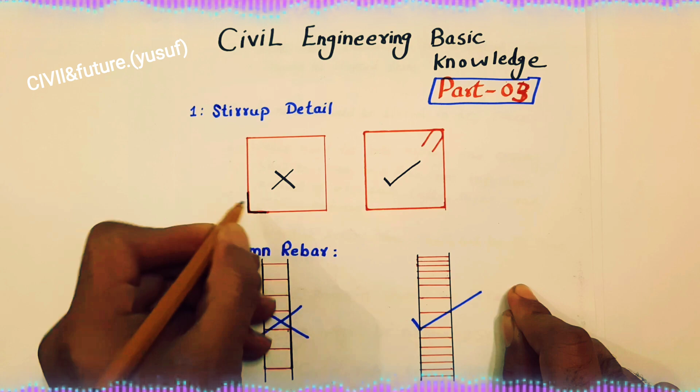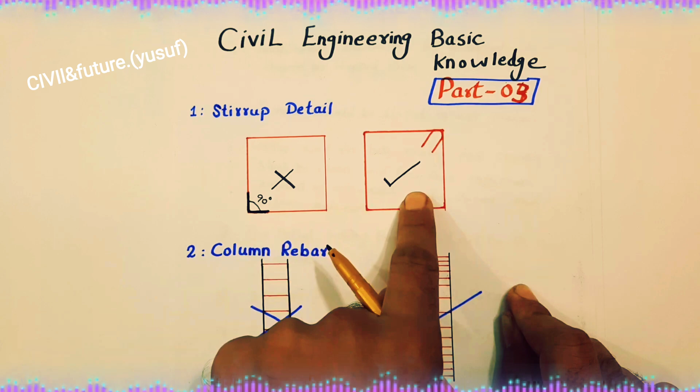Okay guys, you can see this is a stirrup, and you can see the hooks, which are bent with 90 degree. You can see clearly. So guys, this is a wrong method, this is not the proper method, to use the hooks bent with 90 degree. But this is the proper way, the right way of stirrup to design for beam in domestic or commercial building. You can see the stirrup size is same, but here the hooks are bent with 135 degree.

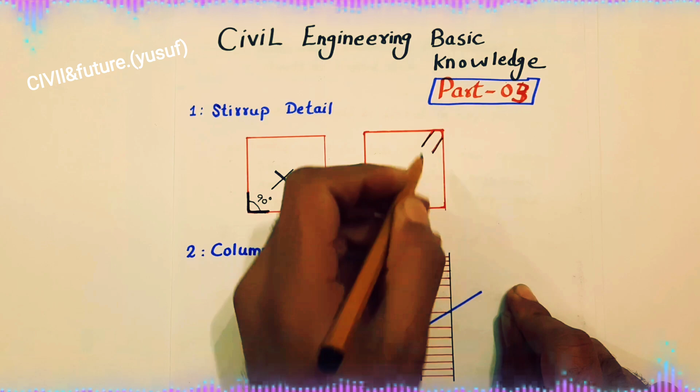So this is wrong and this is the right way for stirrup.

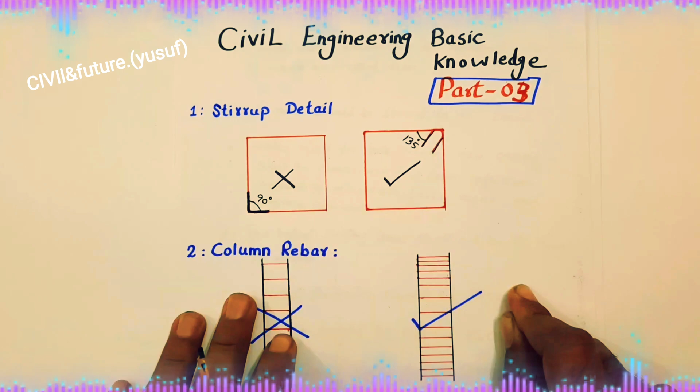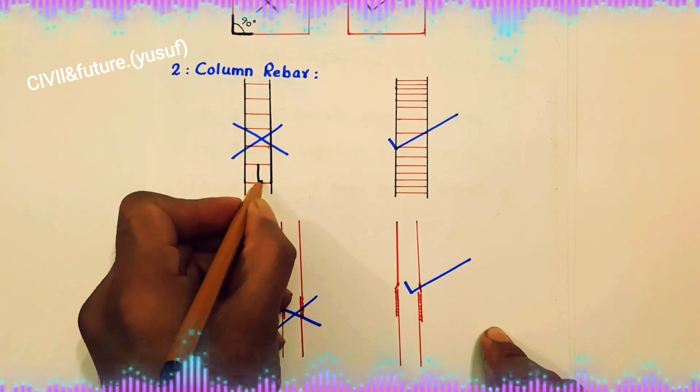The fifth one is, guys, you can see column rebar. So you can see this is the column and the red lines, these are lateral ties. You can see the spacing of lateral ties which is maximum, so this is not the proper way.

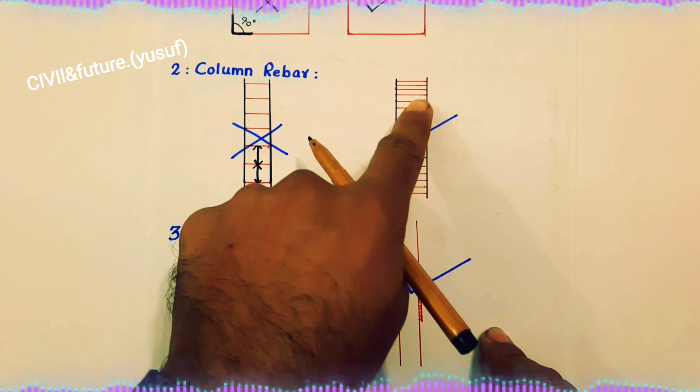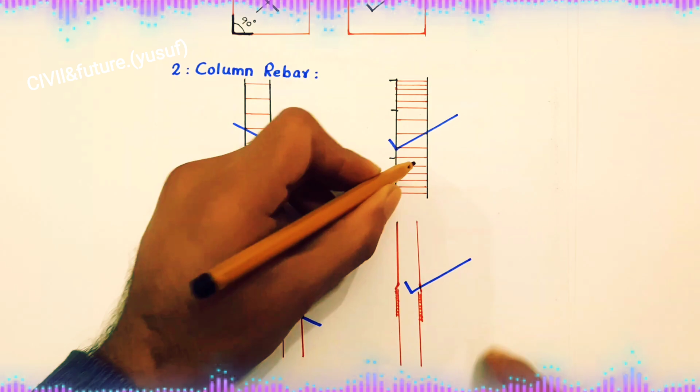So this is the wrong way. What is the right way? The right way is this one. At the bottom and also at the top, the spacing should be minimum, but at the mid, the spacing should be maximum compared to the bottom and top rebars or lateral tie, which is also called rings.

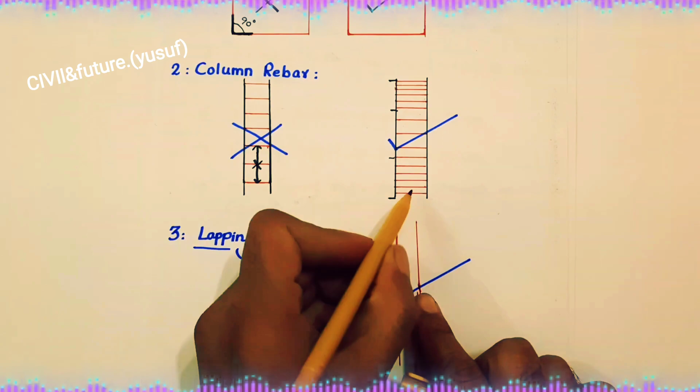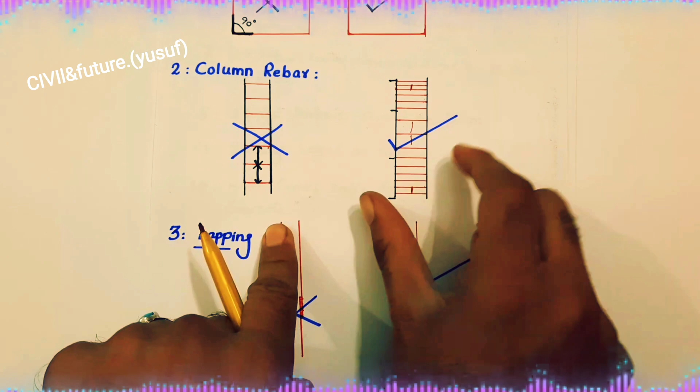Look at here, guys, the spacing you can see clearly, also the top spacing for the lateral ties, but if you come to the mid, this is maximum compared to this one. So this is the right way. But here it is equally at the bottom, at the top and at the mid, so this is the wrong design of rings or lateral tie, but this is the proper way.

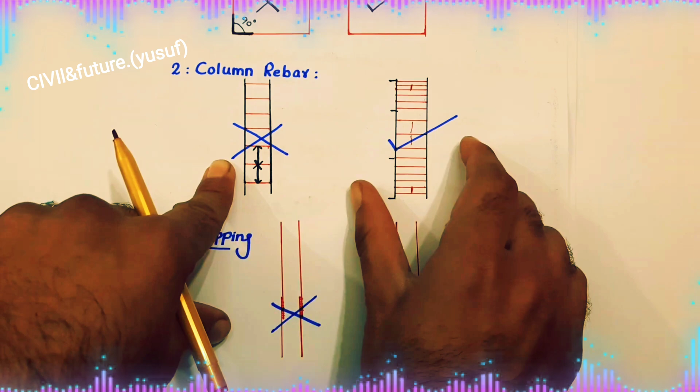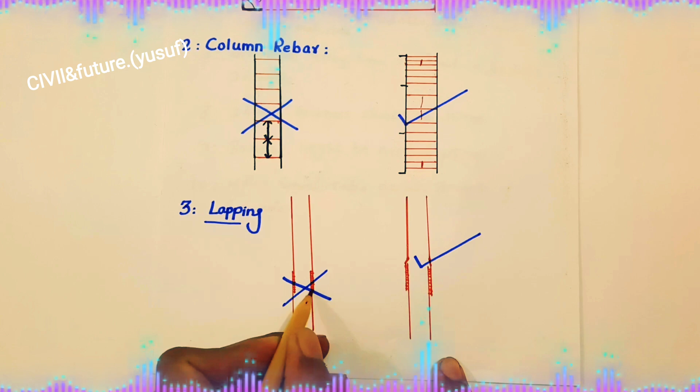Now the third one is lapping. You can see, guys, at the bottom the lapping is provided at the same point. Also you can see one steel rod is overlapped with another one. So this is the wrong way.

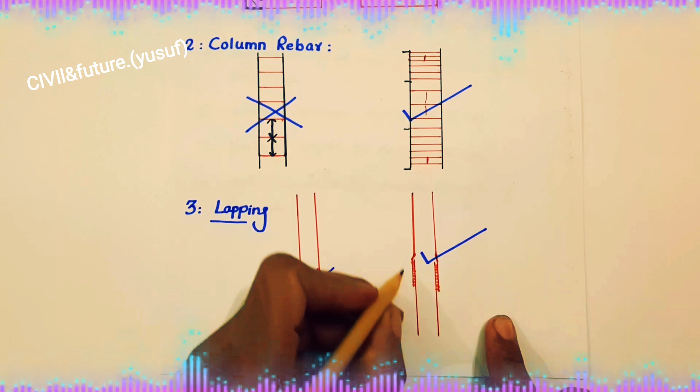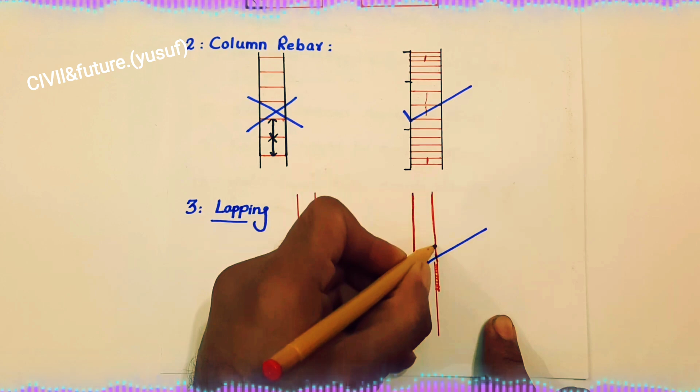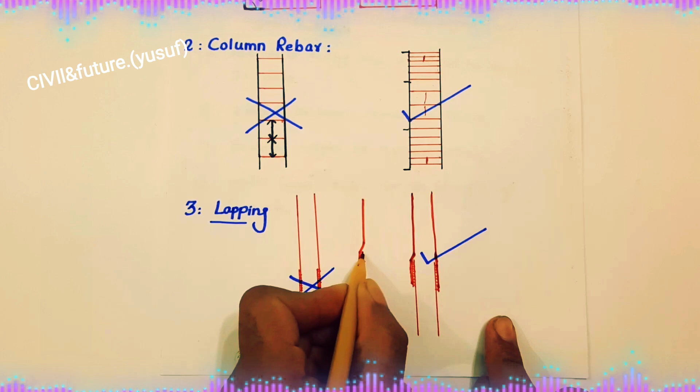What is the right way? The proper way for lapping: you can see, guys, this is the column and this steel is coming, and here you can see the bend with slope, again it is going to the downside. Same, look here, so here is the slope, again going to the downside, same like this. So the other steel rod is going this way. So this is the proper way, not this one, this is the wrong way.

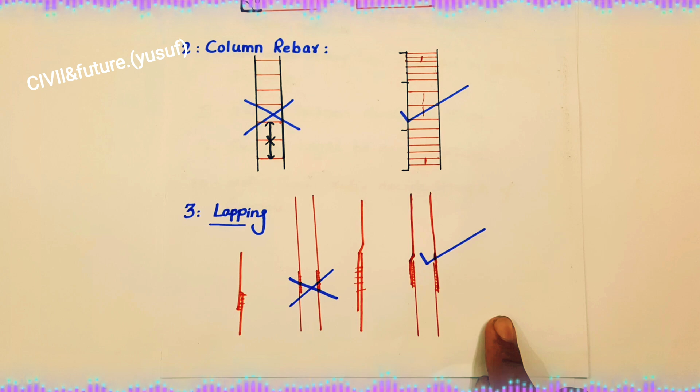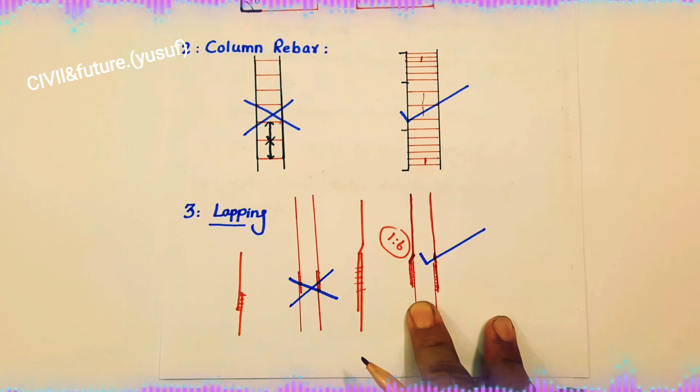This is the wrong way, this one. So what should be the slope? The slope should be 1:6 for this bend. Then you can overlap one steel rod to another, but the lapping should not be provided at the same point, like this, but it should be like this one. So this is the right way and this is the wrong way of lapping.

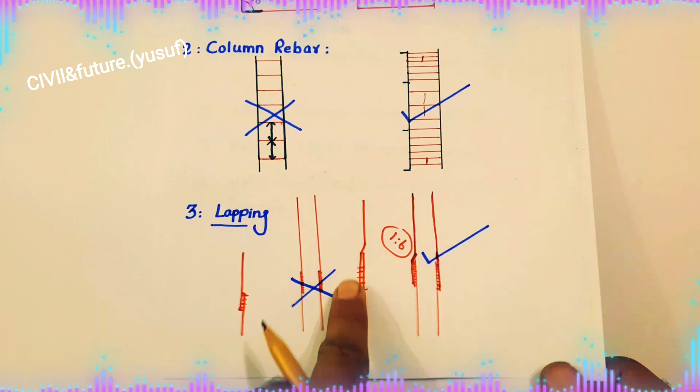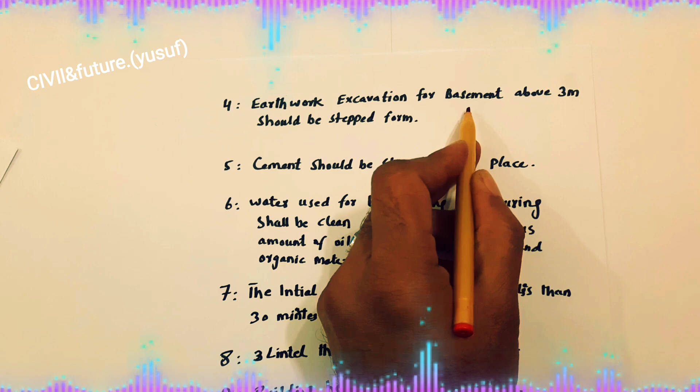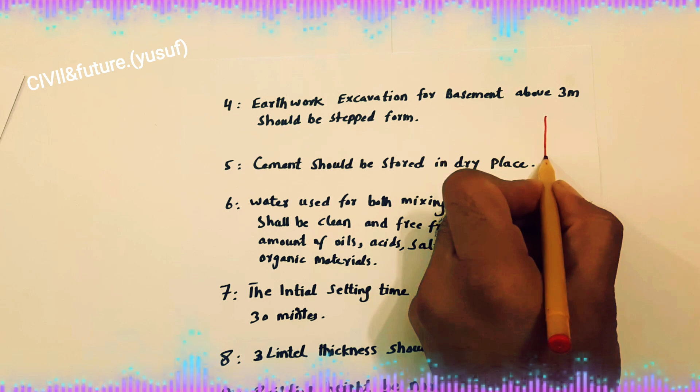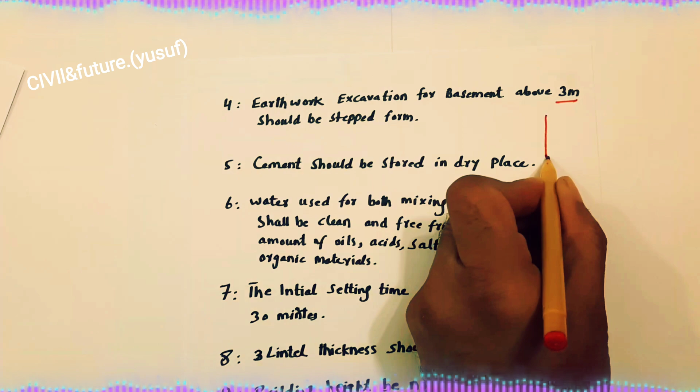Now, guys, the fourth one: earthwork excavation for the basement, not on the ground floor. On the basement, above 3 meters it should be stepped form, not directly. So the basement, if the excavation is more than 3 meters, provide the stepped excavation, same like this one. This is a kind of cross section, right?

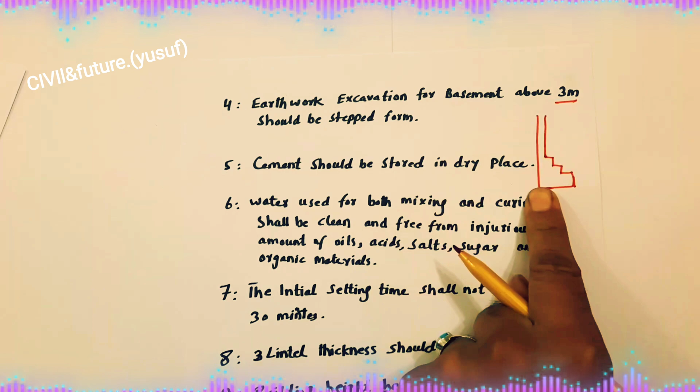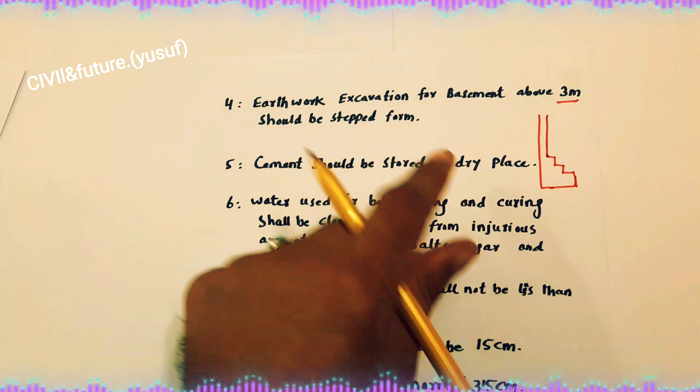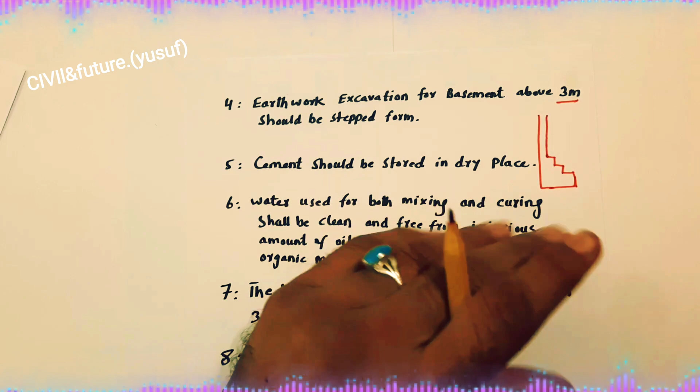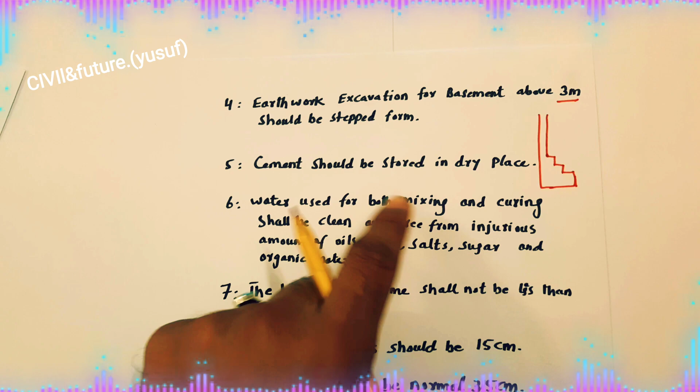The fifth one is, guys, cement should be stored in a dry place. If there is moisture, it is not good for the cement. So cement should be stored in a dry place, above minimum 6 inches above the ground level. Don't store the cement directly on the ground level, but it should be above minimum 6 inches, then you can store it.

The sixth one is, guys, water used for both mixing and curing shall be clean, so don't use dirty water. The water for both mixing and curing shall be clean and free from injurious amounts of oils, acids, salts, sugar, and organic materials. So it should be free from anything I have discussed: oil, acid, salt, sugar, organic materials, for both mixing and curing.

The seventh one is for cement test. Remember, the initial setting time shall not be less than 30 minutes to check its setting for cement.